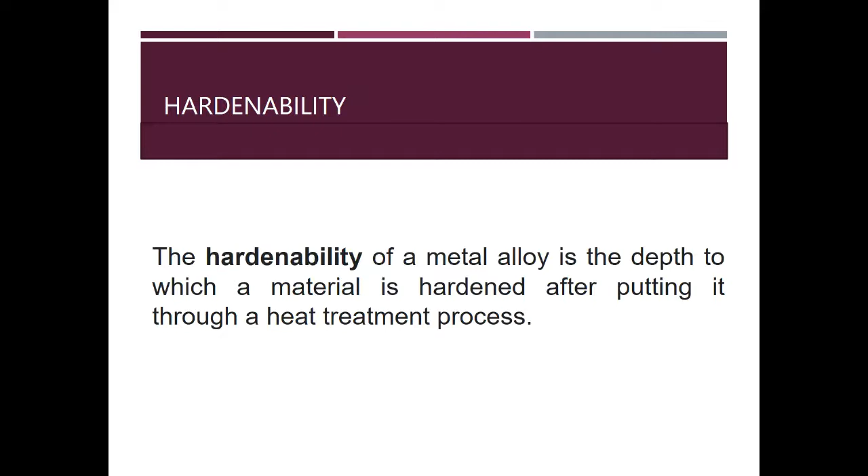Here I am going to explain to you the Jominy end quench test to determine hardenability of steel. What is hardenability? The hardenability of a metal alloy is the depth to which a material is hardened after putting it through a heat treatment process. It should not be confused with hardness, which is a measure of a sample's resistance to indentation or scratching. A relatively convenient method to determine the hardenability of steel is the Jominy end quench test.

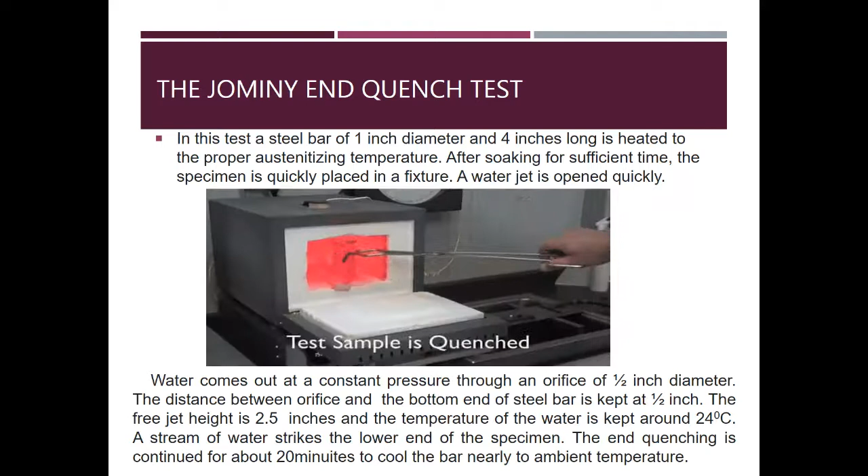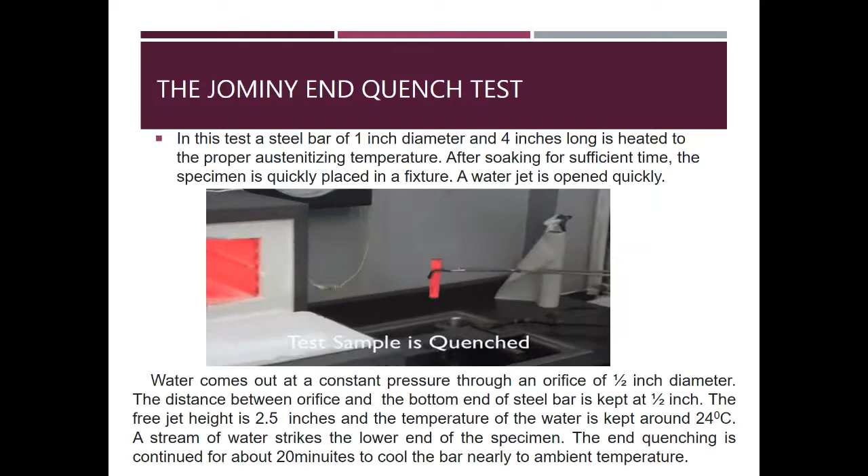In the Jominy end quench test, a steel bar of 1 inch diameter and 4 inches long is heated to the proper austenitizing temperature. After soaking for sufficient time, the specimen is quickly placed in a fixture. A water jet is opened quickly. Water comes out at a constant pressure through an orifice of ½ inch diameter.

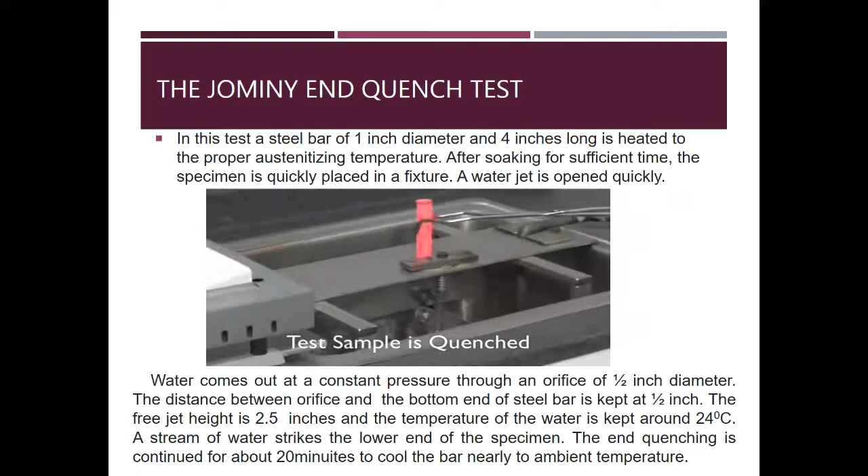The distance between the orifice and the bottom end of the steel bar is kept at ½ inch. The free jet height is 2.5 inches and the temperature of the water is kept around 24 degrees centigrade. A stream of water strikes the lower end of the specimen. The end quenching is continued for about 20 minutes to cool the bar nearly to the ambient temperature.

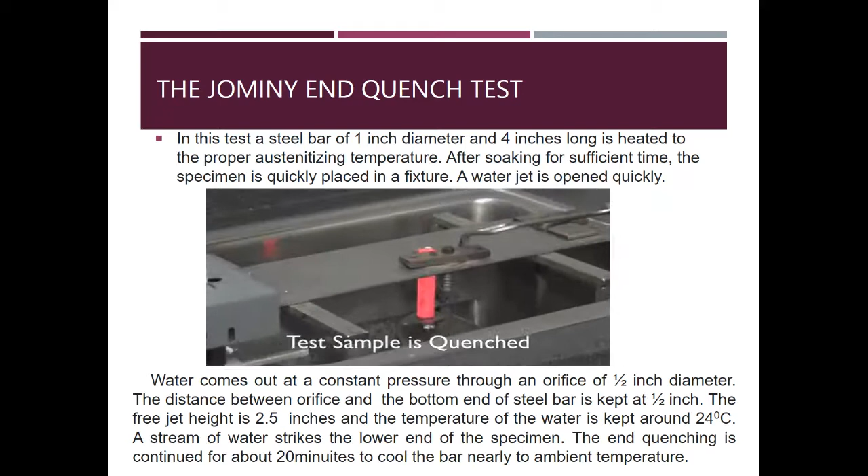Hardness variations in the quenched Jominy bar. Hardness is determined at intervals of 1/16 inch along one end of the flat surface of the bar. Near the quenched end, the interval is reduced to 1/32 inch as hardness impressions are smaller and hardness values may vary rapidly. With 50% martensite in a 0.8% carbon steel, the hardness value of 54 HRC is reached. This distance is measured from the quenched end in units of 1/16 inch. This distance is the Jominy distance.

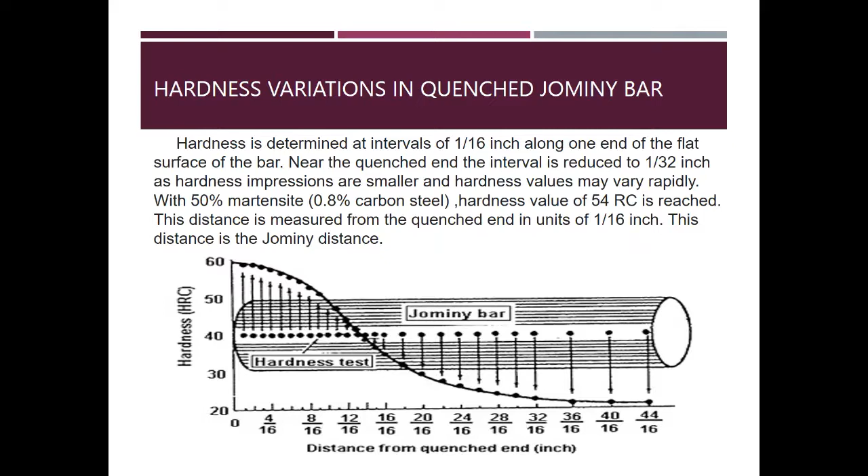Having determined the Jominy distance, we can now estimate the hardenability using the Grossmann chart. Here one more parameter is there. The severity of quenching medium is given by the heat transfer equivalent H, which is nothing but the ratio of the heat transfer coefficient between steel and medium and the thermal conductivity of steel. Here for water, H is equal to 1.